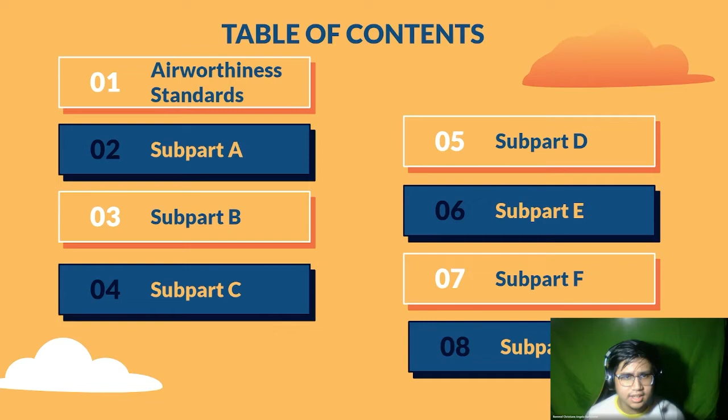Airworthiness standards: Cockpit voice recorders, or CVRs. Each cockpit voice recorder has operating rules and must be approved and installed so that it will record the following: voice communication in an airplane of a flight crew, voice or audio signals identifying navigation or approach aids introduced into a headset or speaker, and in addition, if data link equipment is installed, all data communication using an approved data message set.

To add up, the preamplifiers and filters of the recorder must be adjusted or supplemented so that the intelligibility of the recorded communication is as high as practicable when recorded under flight cockpit noise conditions. This recording requirement must be met by installing a cockpit mounted area microphone located in the best position for recording communications for the first and second pilot stations and voice communication of other crew on the flight deck.

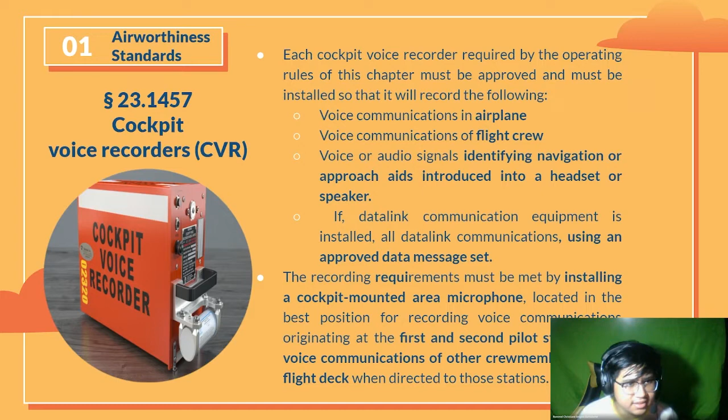Let's move on to the next slide. For the CVR, we have its own sources recorded on a separate channel. For the first, second, and fourth channel, they are the same in terms of input from each boom, mask, or handheld microphone, headset, or speaker.

The difference is that the first channel is used at the first pilot station, the second channel is used at the second pilot station, and the fourth channel is used for the third and fourth crew members. Let's not forget the third channel, from the cockpit mounted area microphone. In addition, as practicable, all sounds received by the microphone must be recorded without interruption, irrespective of the position of the interphone transmitter key switch.

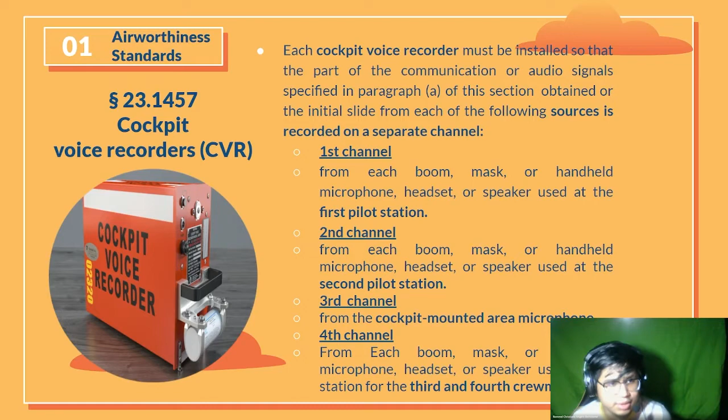Let's move on to the next slide. Each CVR must be installed so that it receives its electrical power from the bus without jeopardizing service to the essential or emergency load, remains powered for as long as possible, and simultaneously stops the recorder and prevents each erasure feature from functioning within 10 minutes after crash impact.

There's also an aural or visual means for pre-flight checking of the recorder for proper operation. Any single electrical failure external to the recorder does not disable the cockpit voice recorder and the flight data recorder, which we'll be talking about later on. It also has an independent power source, providing 10 plus or minus 1 minute of electrical power in the event of interruption of all other power to the CVR.

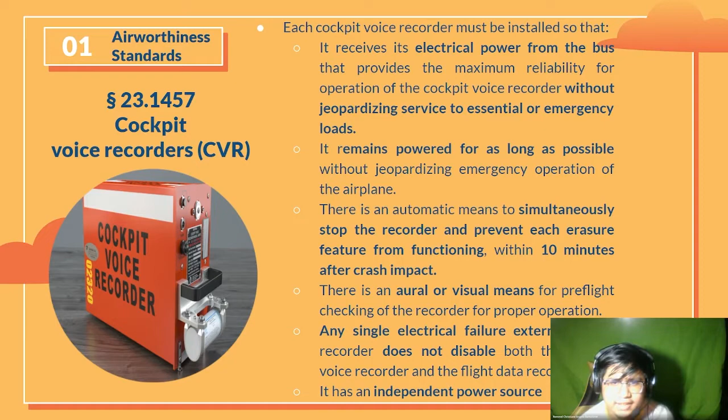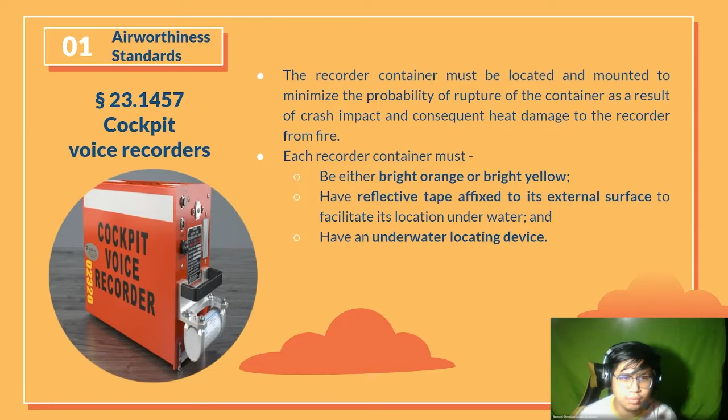Moving on, the recorder container must be located and mounted to minimize the probability of rupture of the container as a result of crash impact and consequent heat damage to the recorder from fire. Each recorder must be either bright orange or bright yellow, as shown in the illustration on the slide, have reflective tape affixed to its external surface to facilitate its location underwater, and have an underwater locating device. Moving on to the flight data recorder.

Same as the CVR, the FDR also has its operating rules. For the FDR, it is supplied with airspeed, altitude, and directional data obtained from sources that meet the aircraft level system. It also does not exceed the limit of 25% of an airplane's mean aerodynamic chord, or MAC.

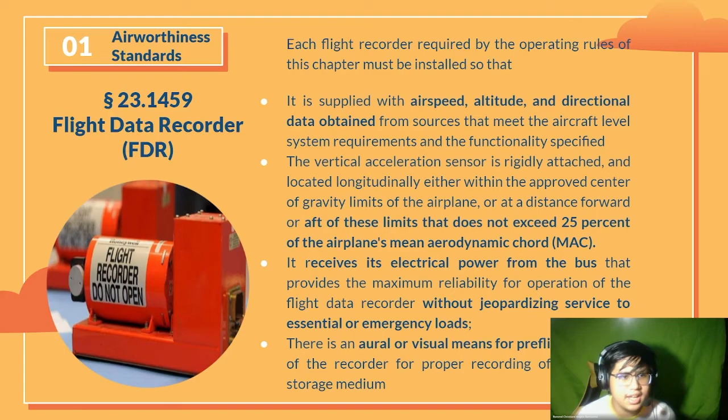It also receives its electrical power from the bus, similar to the CVR, without jeopardizing service to the essential or emergency loads, again similar to the CVR. And there is an aural or visual means for pre-flight checking, similar to the CVR once again. Let's move on to the next part.

FDR also has other operating rules in addition. A non-ejectable record container must be located and mounted, as well as a correlation must be established between the flight recorder readings of airspeed, altitude, and heading, and corresponding readings.

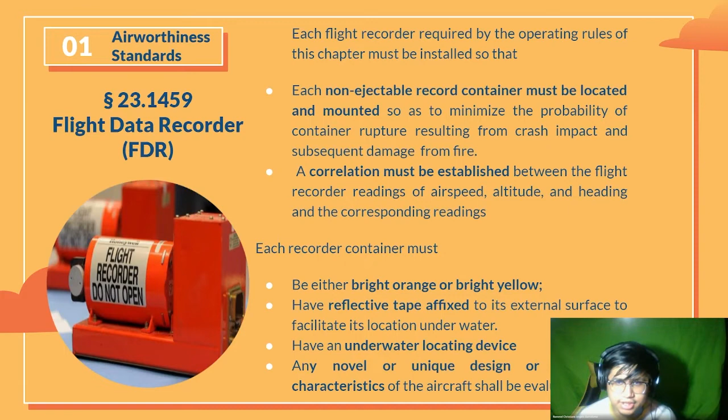The FDR container must be either bright orange or bright yellow, have reflective tape affixed to the external surface to facilitate its location underwater, and have an underwater locating device. Any novel or unique design or operation characteristics of the aircraft shall be evaluated, as these features are shown on the illustration. Let's move on to the next part.

As the applicant must prepare for the continued airworthiness, these are the instructions for continued airworthiness in accordance with Appendix A of this part that are acceptable to the administrator. The instructions may be incomplete at type certification if a program exists to ensure their completion prior to delivery of the first airplane or issuance of a standard certificate of airworthiness, whichever occurs later. And with that, I am done for my part.

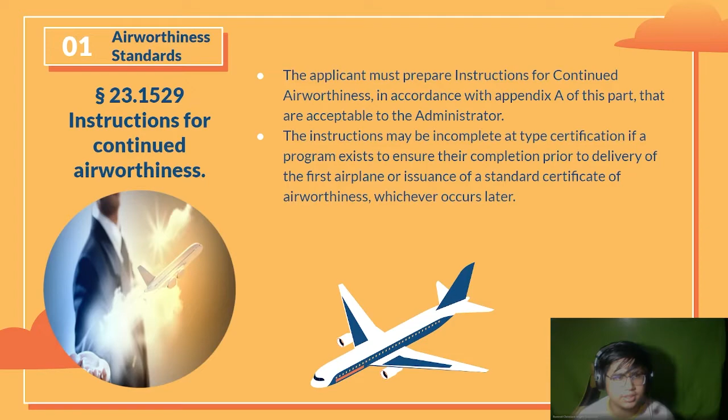Subpart A, General, Applicability and Definitions. Letter A, this part prescribes airworthiness standards for the issuance of type certificates and changes to those certificates for airplanes in the normal category. Letter B, for the purposes of this part, the following definition applies: continued safe flight and landing, which means an airplane is capable of continued controlled flight and landing without requiring exceptional pilot skill or strength.

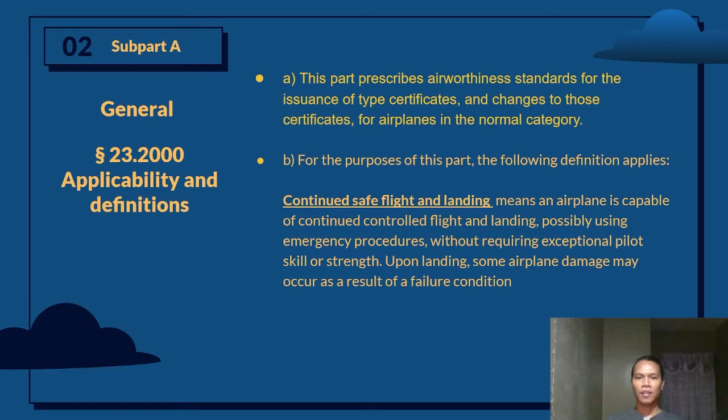Certification of normal category airplanes. Letter A, certification in the normal category applies to airplanes with a passenger seating configuration of 19 or less and a maximum certificated takeoff weight of 19,000 pounds or less. Letter B, airplane certification levels are: Level 1, airplanes with a maximum seating configuration of 0 to 1 passenger. Level 2, 2 to 6 passengers. Level 3, 7 to 9 passengers. And Level 4, 10 to 19 passengers.

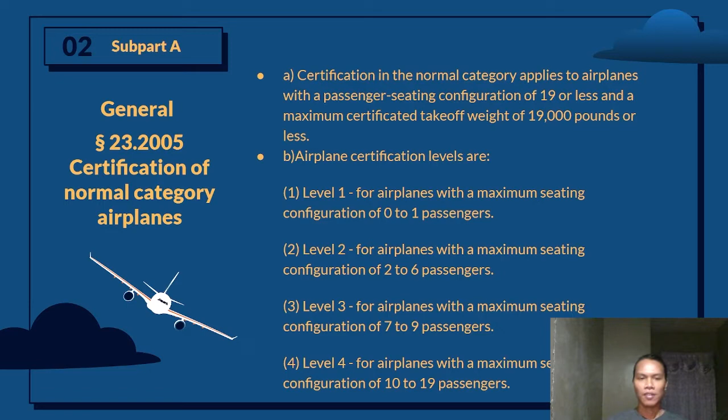Letter C, airplane performance level: Low speed for airplanes with a normal and maximum operating limit speed less than or equal to 250 knots calibrated airspeed, and less than or equal to 0.6 Mach for higher altitude. High speed for airplanes with a normal or maximum operating limit speed greater than 250 knots calibrated airspeed or greater than 0.6 Mach for higher altitude.

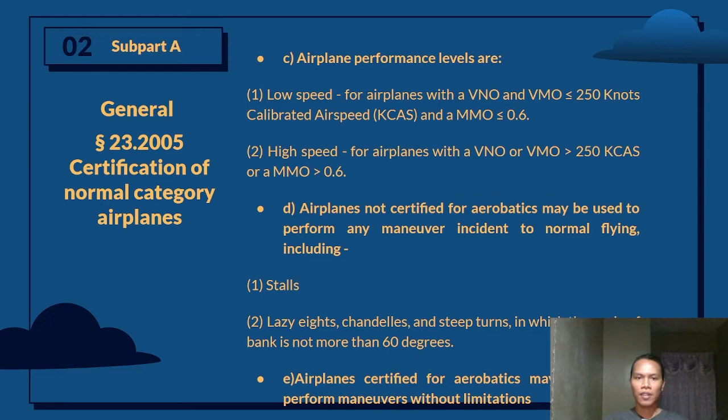Airplanes not certified for aerobatics may be used to perform any maneuvers incident to normal flying. This includes: Number 1, stalls, except whip stalls, which is a stall during a vertical climb in which the nose of the airplane whips violently forward and then downward. Number 2, lazy eights, chandelles, and steep turns in which the angle of bank is not more than 60 degrees. Number 3, airplanes certified for aerobatics may be used to perform maneuvers without limitations other than those established under Subpart G of this part, which is the flight crew interface and other information.

Accepted means of compliance. Letter A, the applicant must comply with this part using a means of compliance, which may include consensus standards accepted by the administrator. Letter B, an applicant requesting acceptance of a means of compliance must provide the means of compliance to the FAA in a form and manner acceptable to the administrator.

Subpart B is divided into two parts: performance and flight characteristics. For the performance part, first is weight and center of gravity. Here, the applicant must estimate the weight and center of gravity in relation to a safe flight while meeting all of the aircraft's condition standards. Performance data: the aircraft must meet the performance standards of this subpart, which includes standard atmospheric conditions at sea level and ambient atmospheric conditions. Stall speed.

Here, the applicant must determine the minimum steady flight speed of the aircraft for each flight configuration in normal operation. Takeoff performance: the applicant must assess the airplane's takeoff performance in relation to characteristics including stall speed, minimum control speed, and climb gradients.

Climb requirements, which include all engines working on an initial climb, loss of thrust on multi-engine aircraft, and a climb gradient without adding to pilot workload in a balked landing. Climb information, discussing climb performance data such as weight, altitude, and temperature, while taking into account that the operation limits range from single engine to all multi-engine aircraft.

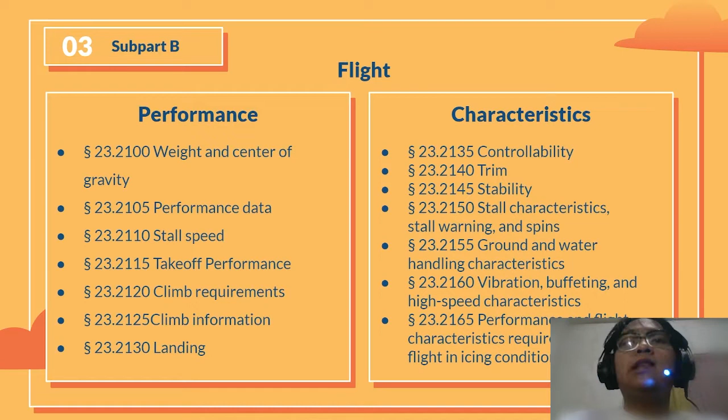Vibration, buffeting, and high-speed characteristics include the features and limiting elements of vibration and buffeting during the airplane's operation. Lastly, performance and flight characteristics are required for flight in icing conditions, implying the applicant requesting certification for flight in icing conditions must meet these requirements.

The next subpart will be about structures. The structural design envelope tackles the requirements for which the applicant must show compliance in terms of aircraft design and operational parameters, which affect the factors of structural load.

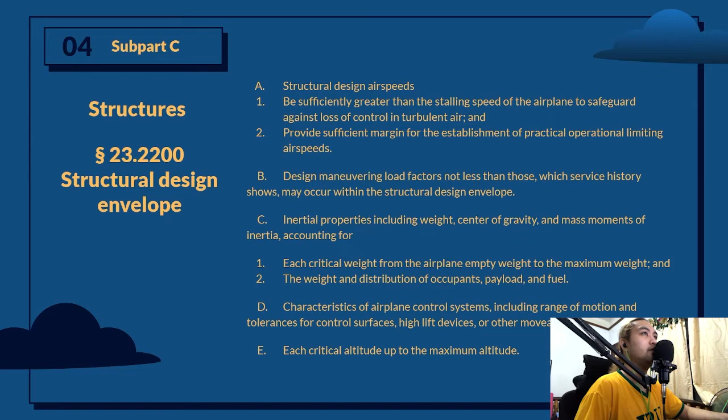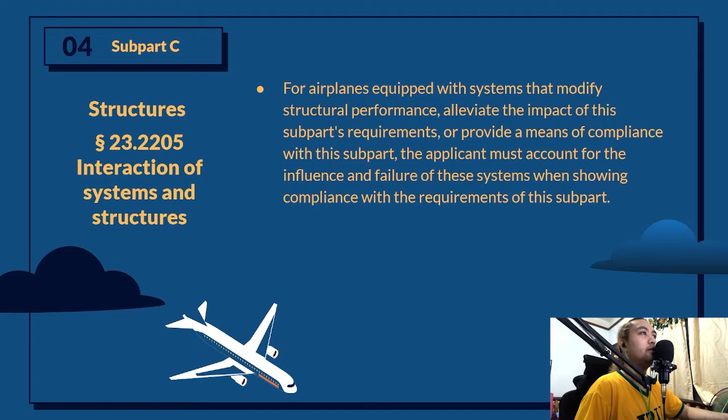Next is the interaction of systems and structures. Aircraft equipped with systems that modify structural performance to comply with requirements must account for the influence and failure of these systems.

In terms of structural design loads, the applicant must determine the applicable structural design loads, loads required, and the magnitude of the applicable structural design load.

In terms of flight load conditions, the applicant must determine the atmospheric gust, the symmetric and asymmetric maneuvers, and lastly the asymmetric thrust.

As for ground and water load conditions, the applicant must determine the structural design loads resulting from taxi, takeoff, landing, and handling conditions on the applicable surface in normal and adverse attitudes and configurations.

As for component loading conditions, the applicant must determine structural loads acting on each individual engine mount, each flight control, high lift surface, system, and its support. Lastly, structural loads regarding the pressurized cabin.

Now, for limit and ultimate loads, the applicant must determine the limit loads and ultimate loads, which are multiplied by a 1.5 factor of safety unless otherwise stated.

Now, in terms of structural strength, the structure must support the limit loads and ultimate loads without interference with the safe operation of the aircraft, and without detrimental permanent deformation.

Now, for structural durability, the applicant must develop and make inspections in order to avoid structural failures and fatal injuries. The implementations depend on the aircraft, since there are other types of aircraft with different capabilities.

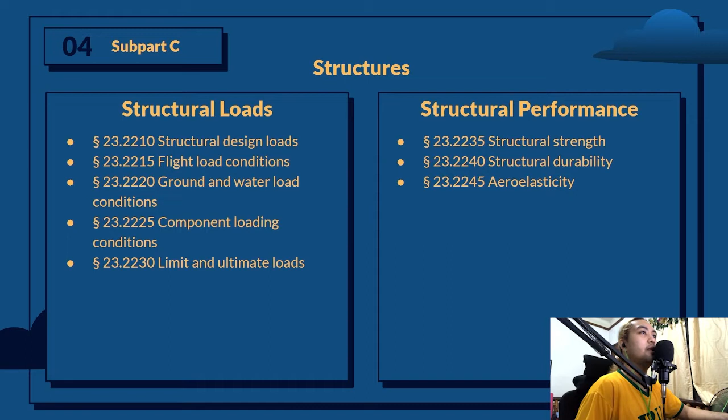Now, for aeroelasticity, the aircraft must be free from flutter, control reversal, and divergence. For design and construction principles, the applicant must design each part for the expected conditions of the aircraft.

Design data must define the part, configuration, and materials used. The suitability of each design must also be known, since it is an important part of safety operations.

Now for protection of structure, the applicant must protect each part of the aircraft, including the smallest part, against deterioration. Each part of the plane must have proper ventilation and drainage. Each part that requires maintenance must incorporate a means into the aircraft design to allow such actions to be accomplished.

For materials and processes, the applicant must determine the durability of each material and part according to the effects of environmental conditions, together with the methods and its processes.

For special factors of safety, the applicant must determine a special factor of safety for each critical design value for each part by means of using quality controls and specifications.

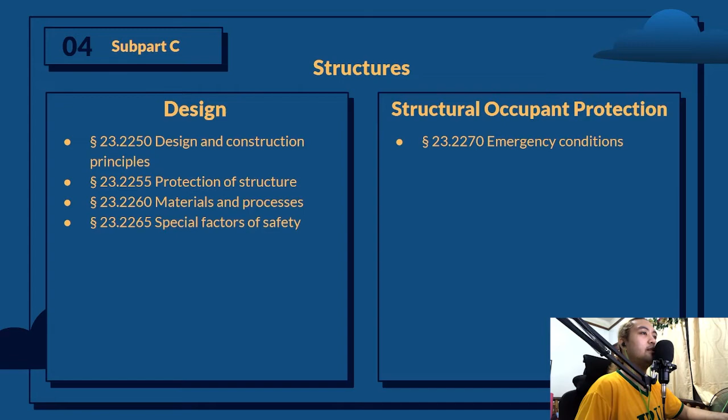Now, lastly, in terms of emergency conditions, the occupants must be protected against injury with the proper use of safety equipment, taking into account all possible hazards. All equipment must work as intended, and lastly, occupant safety is a must.

For flight control systems, the applicant must design airplane flight control systems to operate properly and protect against hazards. The applicant must also design trim systems, if installed, to protect against incorrect trim operations and provide a means to indicate the trim control movement, the trim position, its neutral position for lateral and directional trim, and lastly, the range for takeoff.

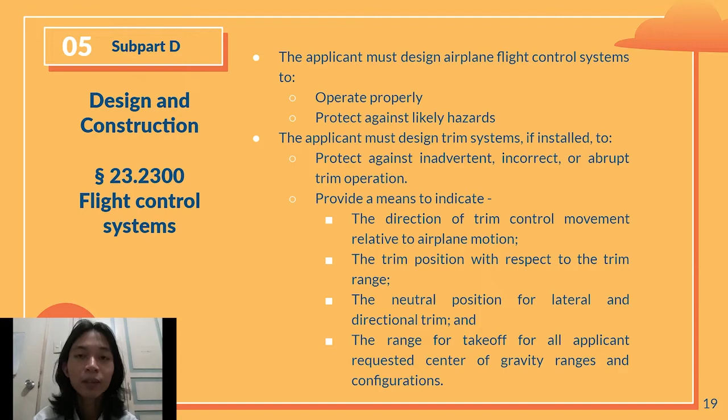For landing gear systems, first, the design of the landing gear system must be reliable during surface operations and in the event of a system failure. Second, it must have sufficient kinetic energy absorption to account for landing or to demonstrate aborted takeoff.

And lastly, for systems that actuate the landing gear, there is a positive means and alternative means to bring the landing gear into the landing position.

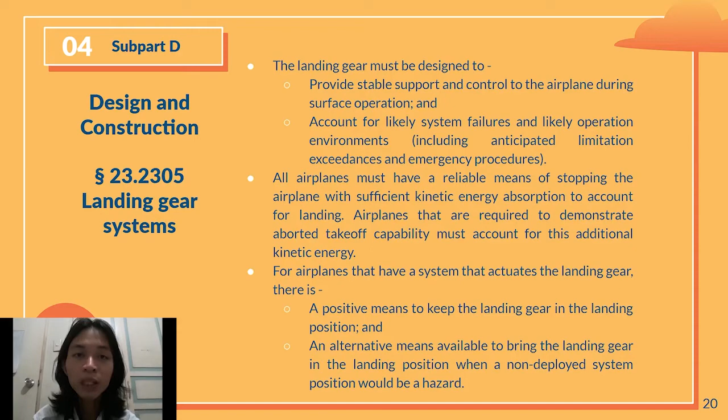For buoyancy of seaplanes and amphibians, airplanes intended for operations on water must provide an excess buoyancy of 80% and have sufficient margin to stay afloat at rest in calm water without capsizing.

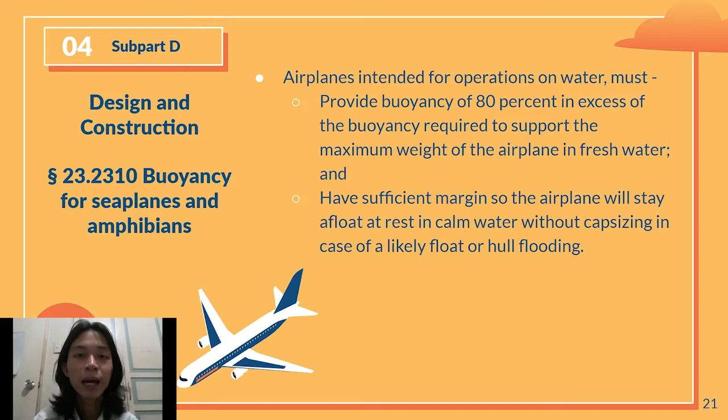For means of egress and emergency exits, the plane is designed to facilitate rapid and safe evacuation and have a means of egress or exit that is easily accessible from the inside and outside. Airplanes approved for aerobatics must have means of egress during flight.

For an occupant physical environment, the airplane must be designed to allow clear communication within the aircraft, to protect the passengers, pilot, and flight controls from external objects.

For level 4 airplanes, each windshield and structure in front of the pilot must withstand without penetration an impact equivalent to a 2-pound bird when the airplane's velocity equals its maximum approach flap speed.

The airplane must also provide air at a breathable pressure in any event that may happen. If a pressurization system is installed, the airplane must be designed to protect against decompression to an unsafe level and excessive differential pressure. For fire protection, some parts of the aircraft must be self-extinguishing and flame-resistant.

Thermal or acoustic materials in the fuselage, if installed, must not be a flame propagation hazard. Sources of heat within each baggage and cargo compartment that are capable of igniting adjacent objects must be shielded and insulated to prevent such ignition.

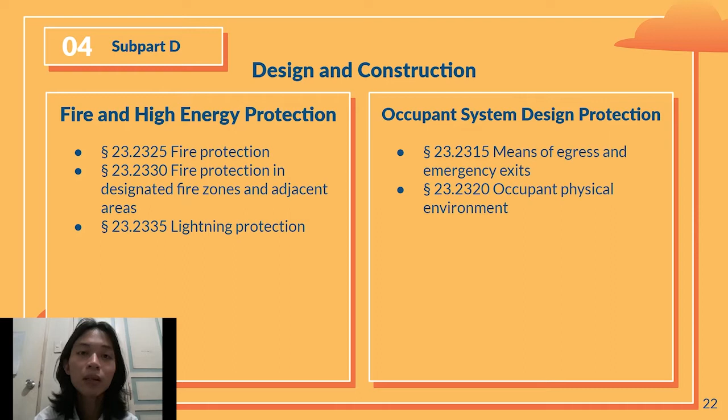For lightning protection, the airplane must be protected against catastrophic effects from lightning. Most airplanes' outer skin is made up of aluminum, which is a good conductor that allows current to flow through the skin from the point of impact to some other point without interruption or diversion to the interior of the aircraft.

As for Part 23.2400, things that need to be considered and included in the power plant installation are the necessary components for propulsion, the type certification of engine and propeller in accordance with the FAA standard, the operating conditions including foreign object threats, the sufficient clearance of moving parts to other airplane parts and their surroundings, the hazards in operation as well as other hazards such as accumulation of fluids, vapors, or gases, the vibration and fatigue, and lastly, the components.

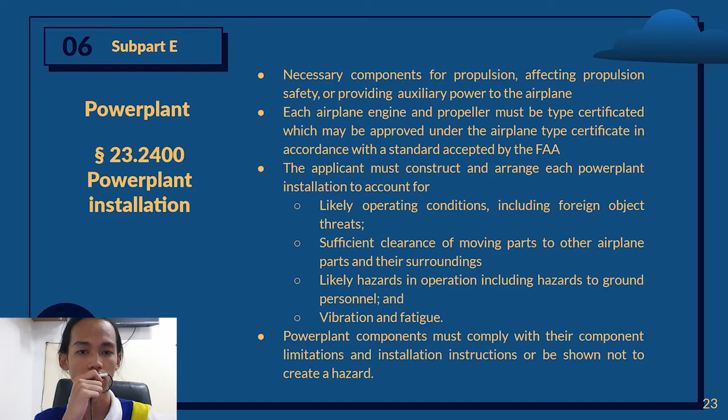The components must also comply with their limitations and installation instructions. For the automatic power or thrust control systems, they must be designed to avoid unsafe conditions during normal operations. Also, inadvertent system operation must be prevented, or if not, it must not result in an unsafe condition.

If the system failure is extremely remote, it must provide a means for the flight crew to verify the system is in an operating condition, as well as to override the automatic function and prevent inadvertent system deactivation.

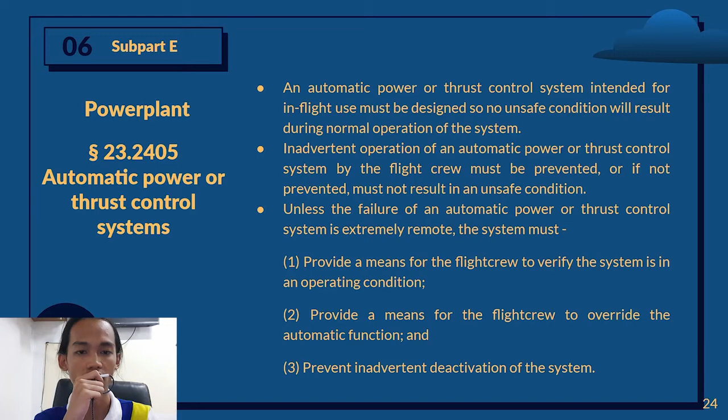For the power plant installation hazard assessment, the applicant must make sure that any hazard resulting from failure of the power plant will not prevent continuous safe flight and landing, cause serious injury, and require immediate action by any crew member for continued operation of any remaining power plant system.

As for Part 23.2415, it explains that the airplane and the power plant design must prevent any accumulation of ice or snow that adversely affects their operations.

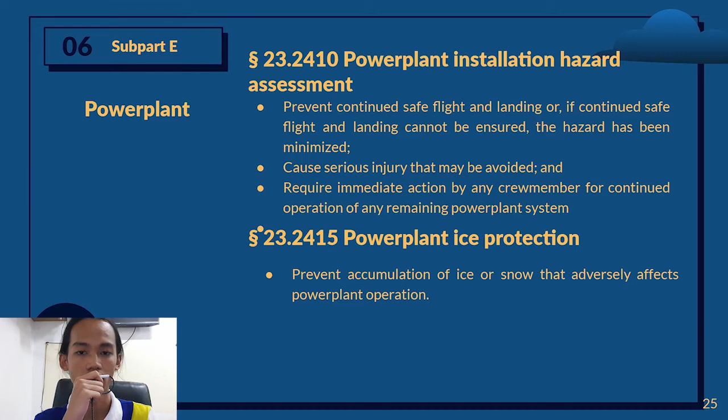For the reversing systems, they must be designed to avoid unsafe conditions, and the airplane is capable of continued operation after single or combination of system failures and malfunctions.

For the power plant operational characteristics, this includes power plant operation without any hazards shown during normal and emergency operation. Also, the pilot must be capable of stopping the power plant in flight and restarting it within an established operational envelope.

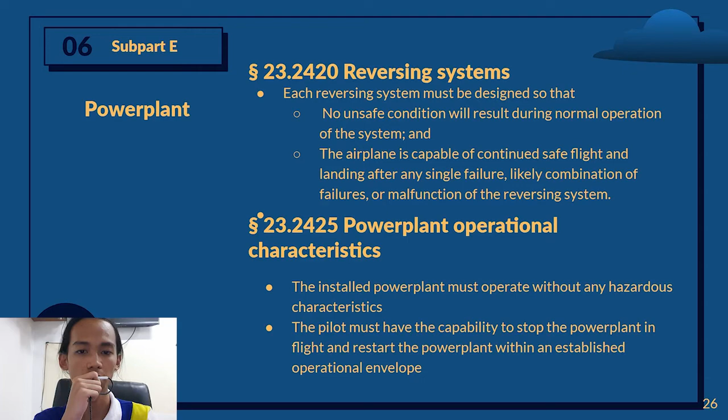Next, Part 23.2430 basically covers the requirements needed for the fuel system, and the requirements include the independence between multiple fuel storage and supply systems, preventing ignition of the fuel within the system by lightnings.

Providing the necessary fuel for the power plant and APU, as well as a means to determine the fuel's usage during operation, capable of retaining fuel under all likely operating conditions and minimizing hazards, and lastly, preventing fuel contamination.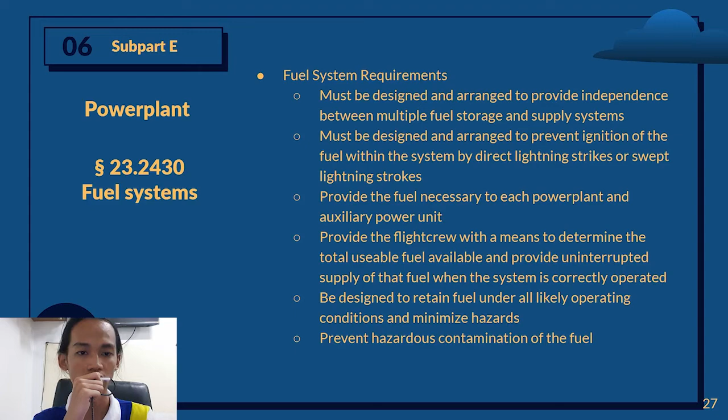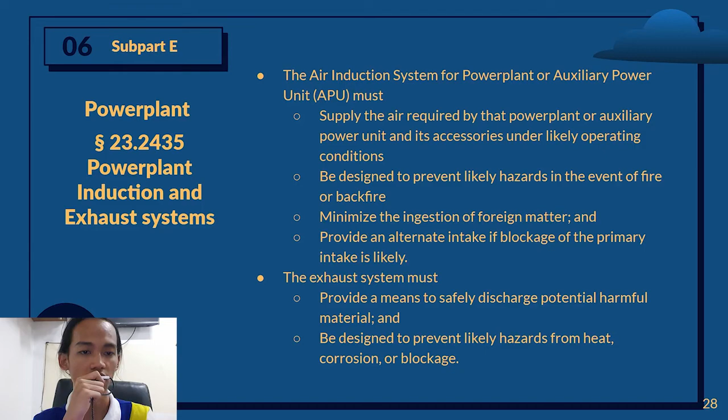This fire zone must provide a means like fire detection or extinguishing system in order to isolate and mitigate fire hazards to the airplane. Also, each component line, fitting, and control subject to fire conditions must be designed and located to prevent hazards resulting from fire, be fire resistant, and lastly, be fireproof or enclosed by a fireproof shield.

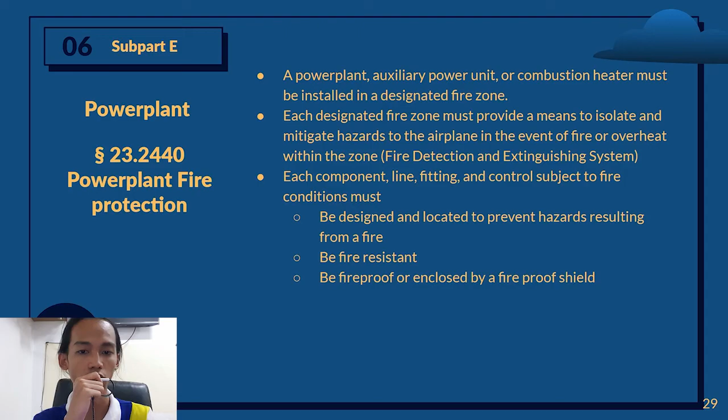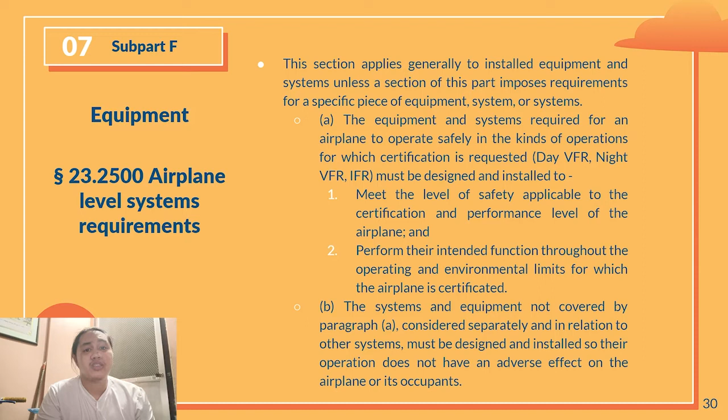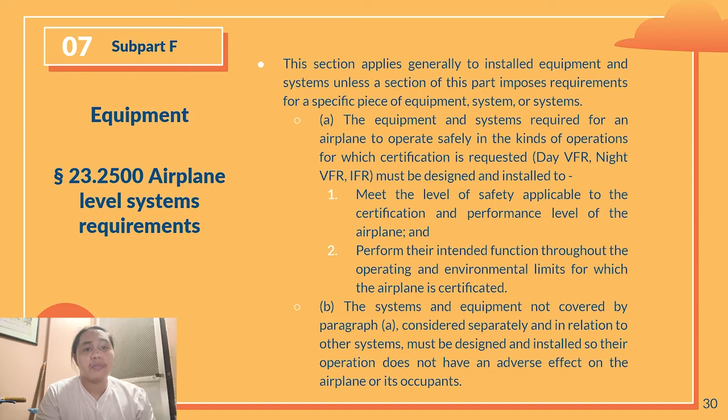For Subpart F, equipment has regulations that need to be followed such as airplane level systems requirements. It is important to have day VFR, night VFR, and IFR during flight operations to meet the level of safety and perform their function during flight operations. Those mentioned, such as day VFR, night VFR, and IFR, must not harm the airplane or its occupants.

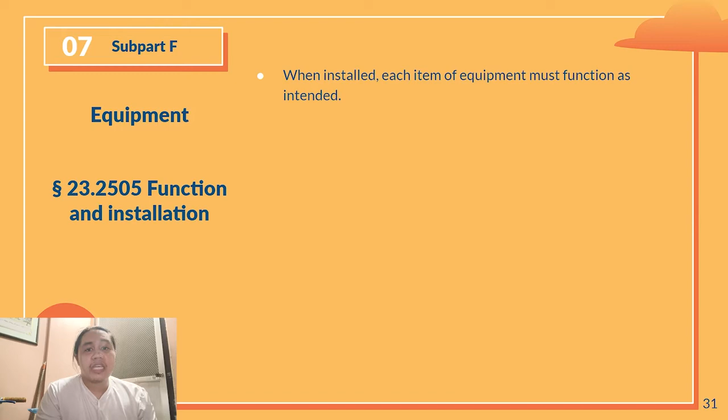Function and installation has a requirement that each equipment must function as intended. For equipment systems and installations, every installed equipment must prohibit failure to the extent of catastrophic failure condition, hazardous failure condition, and even major failure condition.

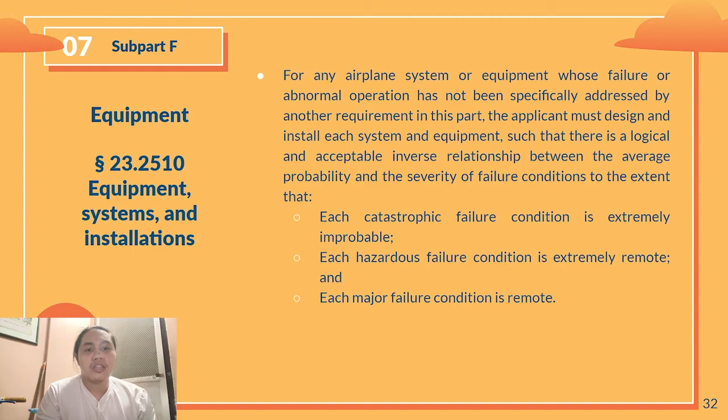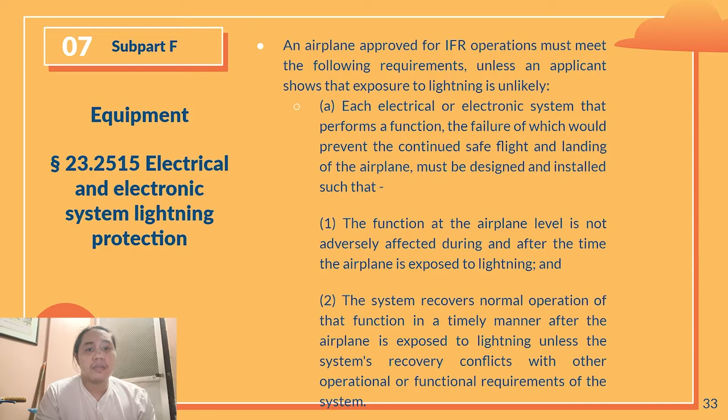Electrical and electronic system lightning protection. In this subpart, the equipment must be designed and installed to not be affected by lightning, and the system must recover during and after it is exposed. Each electrical and electronic system must be designed to recover normal operation of that function in a timely manner after the airplane is exposed to lightning.

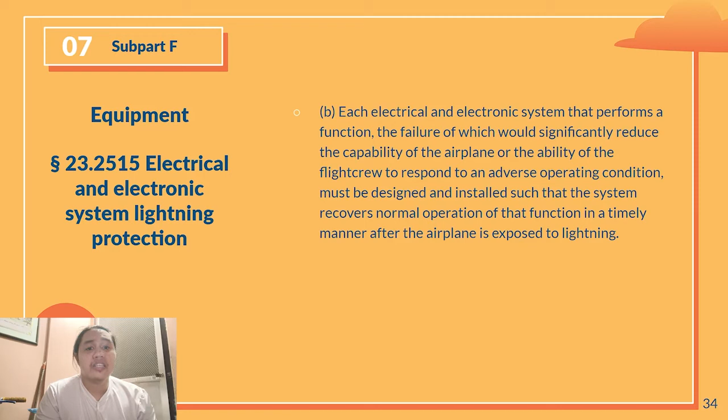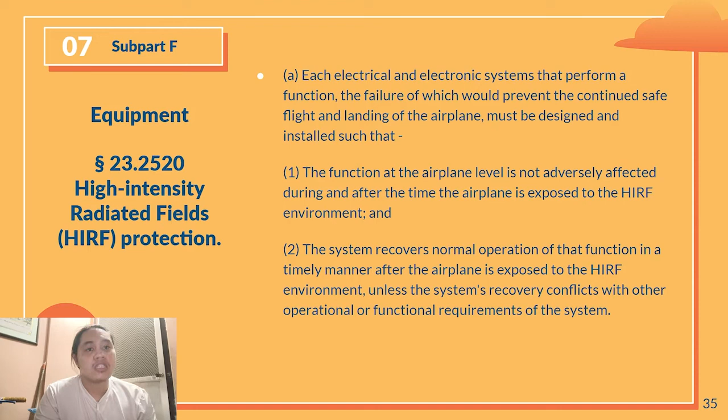High intensity radiated fields protection. The equipment must be designed and installed to not be affected by high intensity radiated fields, and the system must recover during and after it is exposed. Each electrical and electronic system must be designed to recover normal operation of that function in a timely manner after the airplane is exposed to high-intensity radiated fields.

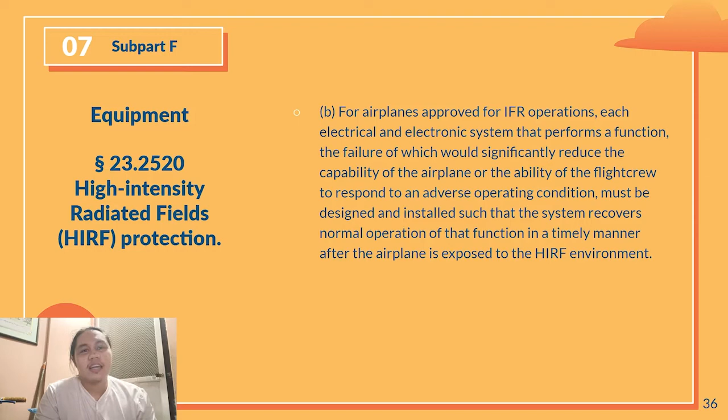System power, generation, storage, and distribution. The system must be designed and installed to supply the power required for operation, ensure no single failure or malfunction, and have enough capacity if the primary source fails to supply essential loads.

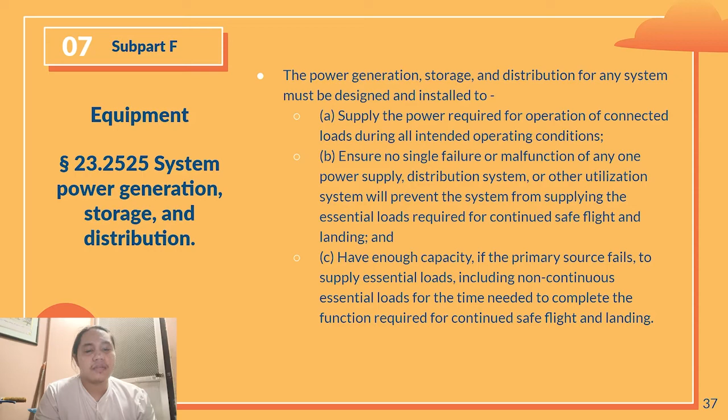External and cockpit lighting. It must install lights to minimize any adverse effects during flight crew duties and also to have anti-collision lights, position lights, taxi and landing lights for night operations, and riding lights for atmospheric conditions.

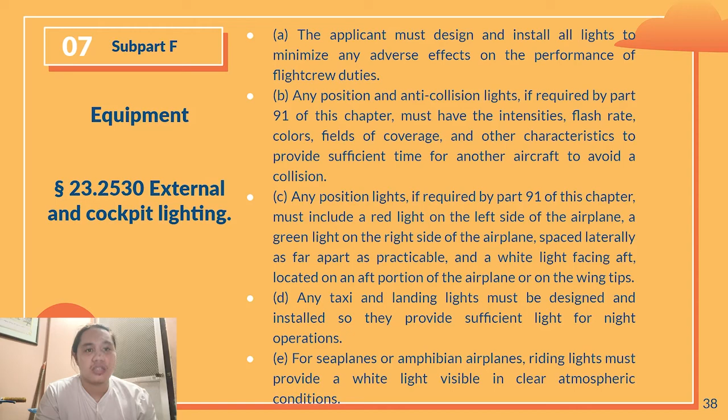Safety equipment. For this part, safety equipment must be identifiable and accessible during flight operations.

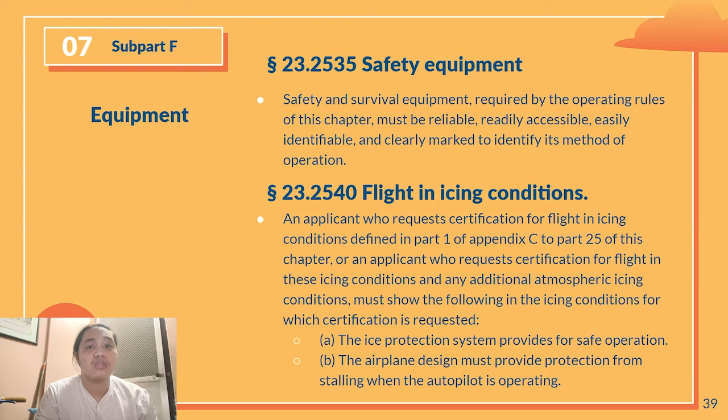Flight in icing conditions: the system must provide safety during operations and provide protection from stalling when the autopilot is operating in icing conditions. Pressurized systems elements must withstand appropriate proof and burst pressures. Equipment containing high-energy rotors must be designed or installed to protect the occupants and airplane from uncontained fragments.

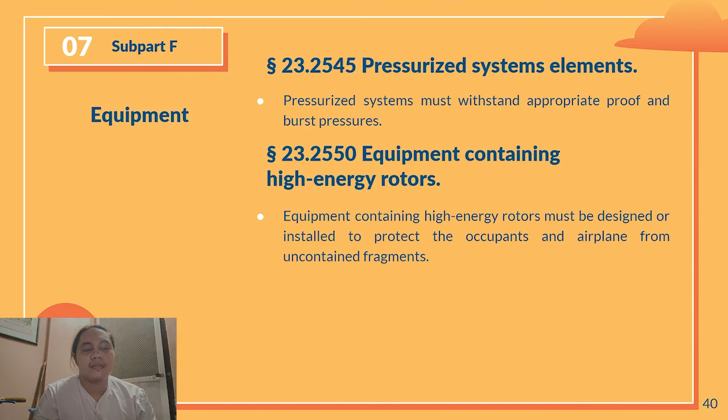Let us move on to the final subpart of Part 23, Normal Category Airplanes, which is Subpart G, Flight Crew Interface and Other Information. In the Flight Crew Interface section, it basically states that the equipment of the pilot and its crew must be accessible and functionable at all times for the sake of safety and readiness. This includes using equipment easily during taxi, takeoff, cruise, landing, etc.